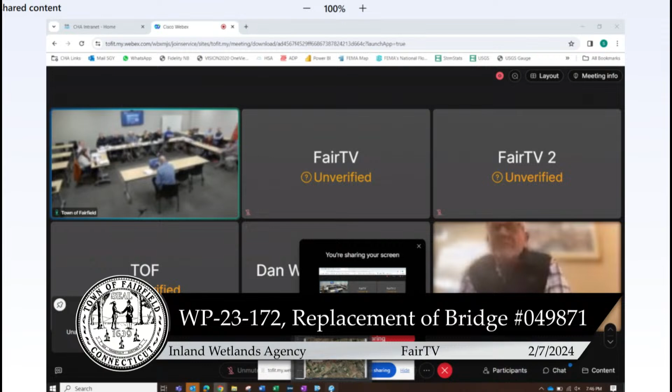That's the town, so. Actually, it's over here, okay. Alright, this is part of a state project. CHA, correct, is the consulting engineer working with the towns of Fairfield.

Welcome, thank you, good evening. My name is Scott Young, I'm a licensed professional engineer here in Connecticut. I work for CHA Consulting. As introduced, we are working with the state of Connecticut through the federal local bridge program, which is also partnering with both the town of Westport and Fairfield for this project. So we're here tonight to run through the proposed replacement of that bridge that's at the town line on Sasco Brook.

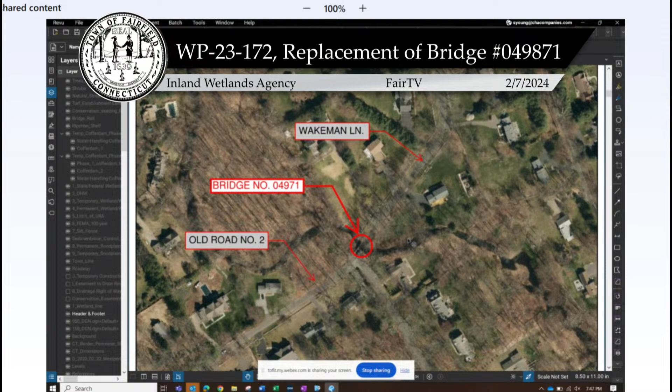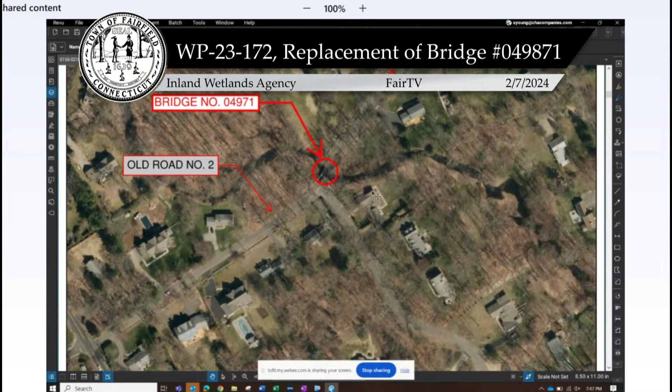And so assume this is good enough, everyone can see alright, there's one behind them. So just to get everyone oriented, Wakeman Lane here on the eastern side of the site transitions to Old Road number 2 into Westport, and here's the brook that's flowing essentially north to south. So just to get everyone somewhat oriented here.

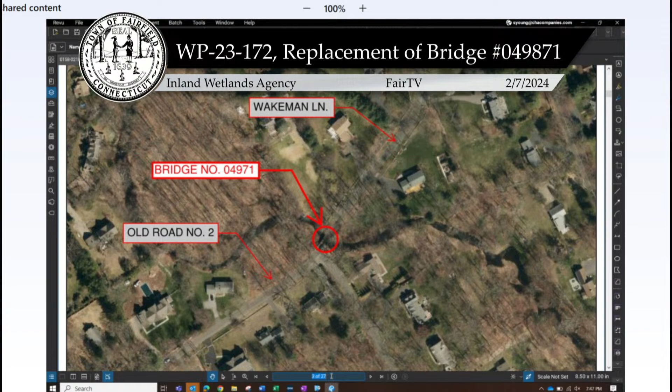So what I'll just do is go through the plans. These are the plans that you all have in front of you, or have seen at some point. What we've done is just put some colors on it to help the presentation, but I want to reassure you that we're not adding anything to the public hearing here. These are just the same plans that you guys have.

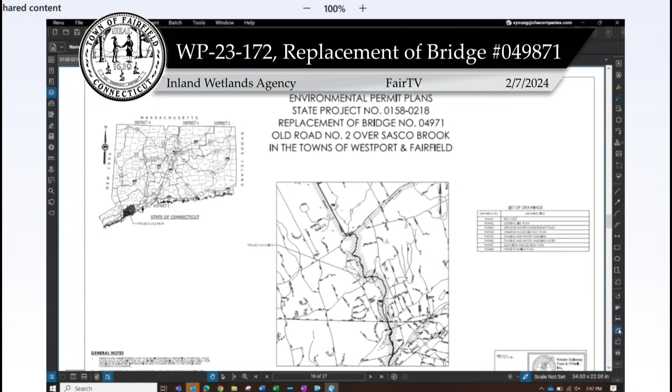This is too small, let me know and I can try to zoom in a little bit. That helps. Slowly, but there it goes.

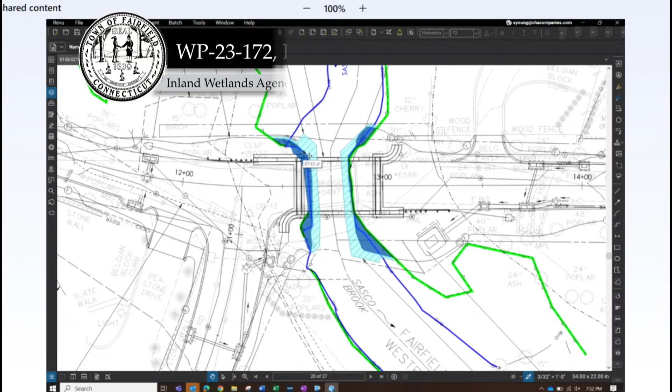So I'll just kind of run through the plans a little more here, just from a wetlands and water course impact standpoint - I'll try to zoom here a bit. The green lines are the wetlands, the blue lines are the water course. We have some permanent water course impacts in dark blue, and some temporary water course impacts in light blue, just from doing the construction and getting in here and doing water handling, keeping the river running while we're doing this work - that's what the temporary impacts are.

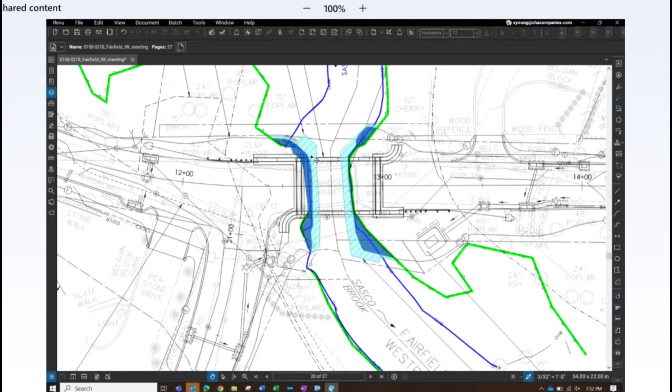I'll show you where that's happening a little later. But it's just removing the existing structure, getting those footings out of there, things like that. Those are considered permanent type of impacts, even though it'll be restored when we're all done.

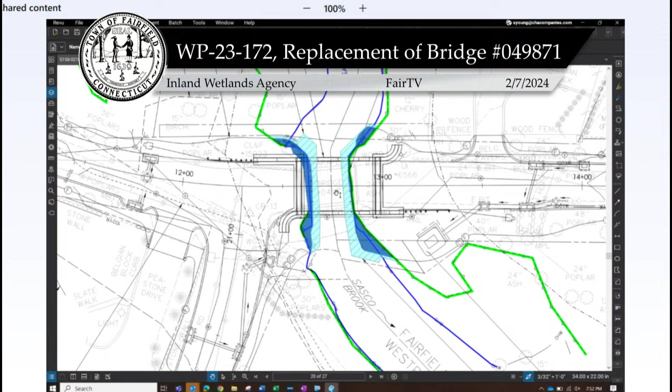So let's see the total impacts. In Fairfield, total impacts are about 110 square feet for wetlands, and for the water course about 380 square feet, so a total of just under 500 square feet of impacts in either wetlands or water course. The upland review area, which is another area you wanted calculated, is about 6,300 square feet, or a little over a tenth of an acre.

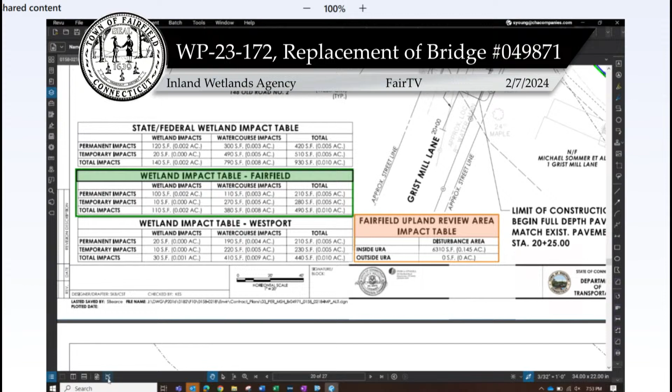As part of our process, we go through the flood management process with the State of Connecticut, which has a memorandum of understanding with DEEP for flood management certification on federal and local bridges. We look at all the town regulations in both towns, as well as state and FEMA regulations, to make sure we're conforming. This slide depicts the area that will be within the floodplain that will be impacted.

Whether it's cuts or fills or whatever, it's just an impact. The blue again is the temporary impact from water handling, cofferdams, or those types of things.

All told, from an impact standpoint, we're going to be about 10 yards less, because if you picture it, we're taking the bridge that was 3 feet and putting it out to 38, creating quite a bit of space there. We're actually raising the road some to make this all work, but the balance of cut and fill has been pretty much balanced. We've done a hydraulic analysis with HEC-RAS, which is software approved by the Army Corps, FEMA, and just about everyone, written by the Army Corps.

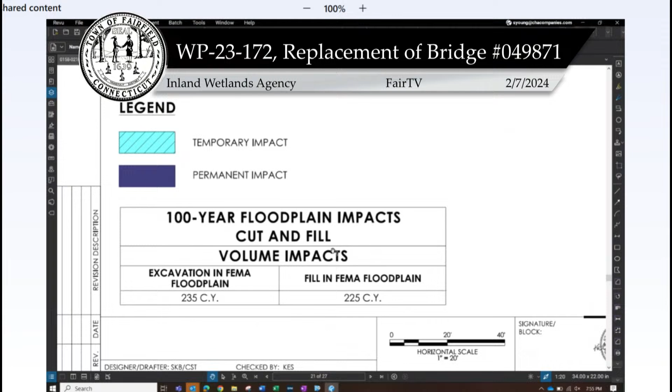We analyze the whole water surface up and downstream. We start at a known elevation from FEMA, go up to a known elevation from FEMA, and do that analysis to make sure we're all good. So even though there's a little change in the floodplain, we've modeled all that to ensure there are no issues as far as water surface elevation.

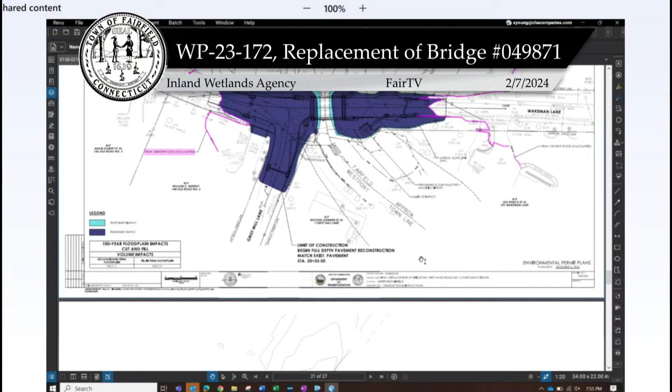Like I mentioned, we'll be closing the road down. This slide depicts to a certain extent that the road will be closed. There'll be some barriers, maybe something similar to Jersey barriers, on both sides. We'll come in with a crane at some point, and it'll probably sit on this side. They'll swing the work into place, so this just gives a quick depiction of what's going on out there as far as work.

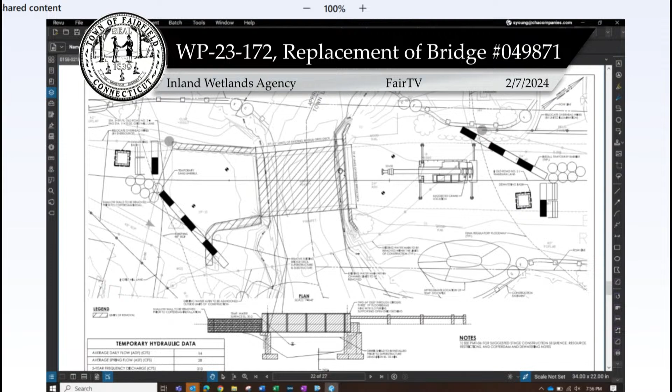We'll be pumping water when there's footing or foundation work going on; we have to discharge any water from the holes. It'll come up and be discharged into dewatering basins outside of wetlands, ensuring that water stays clear.

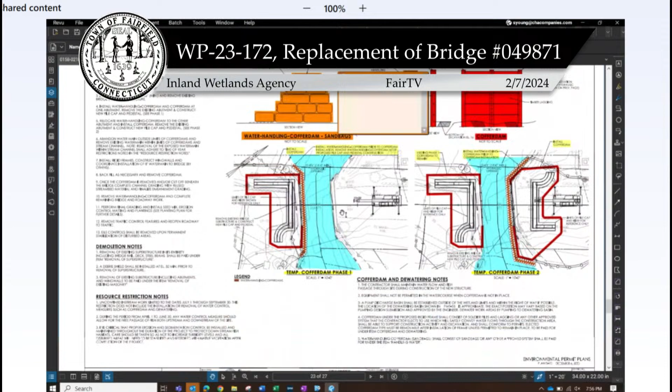So from a water handling standpoint, let's zoom in—this would be phase 1. This is essentially the Westport side, or the west side of the project, where we anticipate starting, based on the alignment of the brook and so on.

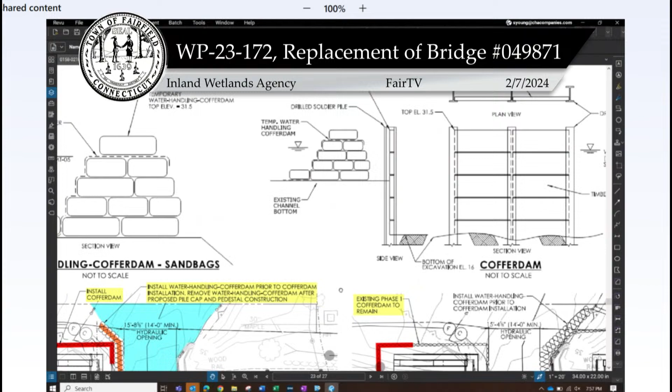We would end up putting in a cofferdam here—essentially sandbags type of thing for water handling. Then we'd actually put in a more rigid cofferdam, steel sheeting or something, so you can do work below grade from a safety and water standpoint. Between the two red lines here, we'll be using a slightly different system with a cofferdam—a soldier pile and timber lagging system, because once we put the structure on top, we can't do it the other way.

So by going with this type of structure—this is a top view looking down on it—they'll put piles in the ground probably every 6 to 8 feet, and then put timber in between to create that buffer or seal. When all is done, they'll remove all the timber and cut those piles down 2 feet below the stream level, because they can't pull them out, unlike the steel everywhere else which they can pull out. That's because we just put a cap over it—the precast structure will be sitting on top, so we can't get through the roof of that to get down to it.

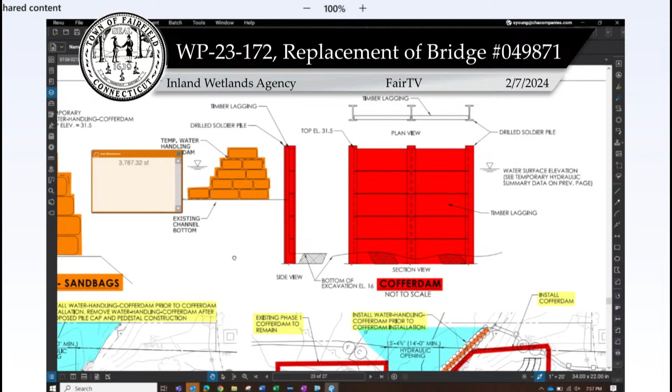So that's only happening where the bridge itself is. On the outside of the bridge, we'll get that out, where we just put this 3-sided cap on top, closing the lid over the river. We can't then pull these piles out because we can't get to them.

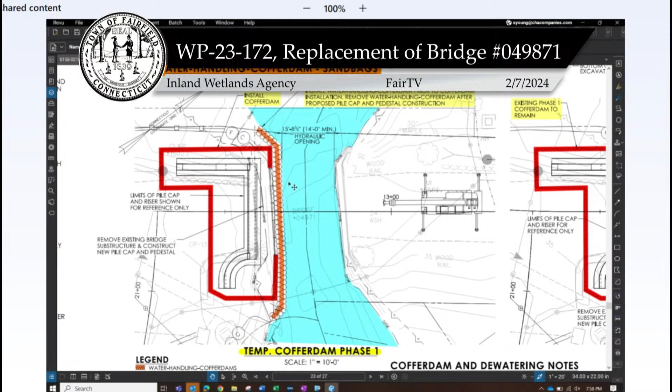Do you all anticipate using pressure treated timber? I doubt it, because it's not a timber you're looking to last long term like that. It'll probably be oak or something, because it'll probably be something you want structurally sound. And if that's something that concerns you, certainly put that as a condition. That's something we want to make sure of.

Excuse me Scott, if I may, Bill Hurley, Fairfield Engineering Manager. You said 2 foot below stream level — do you mean the bottom of the stream, or do you mean water level? Good question. It'll be the bottom of the stream.

So nothing will be sticking up, right? That's the intent, to get it down below so that as the stream moves a little bit here or there, you won't see these things. That's right, that's pretty much a standard — to go 2 feet below the stream bottom level, I should say.

So while all this work is happening on the Westport side, we'll maintain a 14-foot wide channel through here for the river to flow freely. Fisheries folks have seen this, they're all happy with that, as long as we're not cutting the river off, which we're not — we're gonna maintain that.

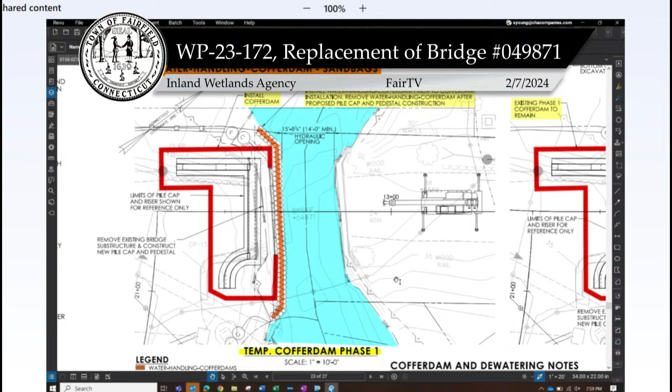And then phase 2, we'll basically move the sandbags over to the other side, put a similar type of system in, and construct that footing on that side. And then again construct the bridge. We'll remove the work and the sheeting that's in place.

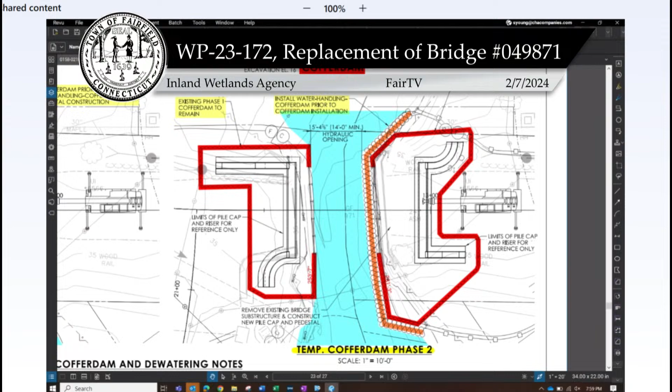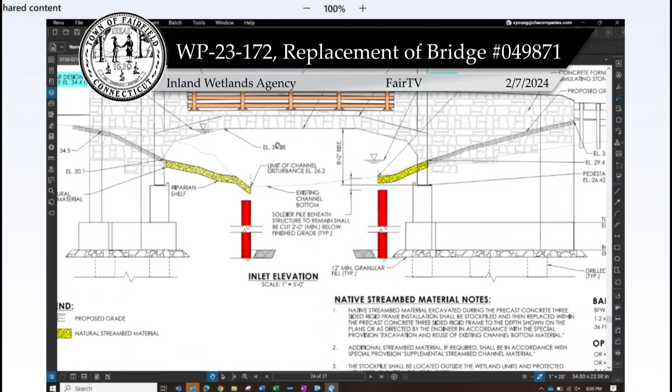This is an elevation view, or side view, of the structure. So this kind of answers your question of how deep it will be — it'll actually be 2 feet below the bottom of the stream level. This is the inlet, or upstream side, so we're looking south here. Water's flowing toward the bridge from this point of view.

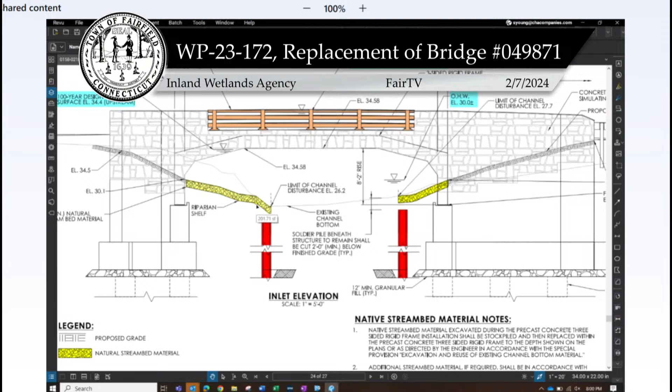There will be some natural stream bed material — not riprap, sorry — put in here for the riparian shelf. It'll be pretty much on the Fairfield side, the left-hand side as it's flowing downstream. So that will be constructed there. You'll see it also on this downstream side looking upstream, so that's also there as well.

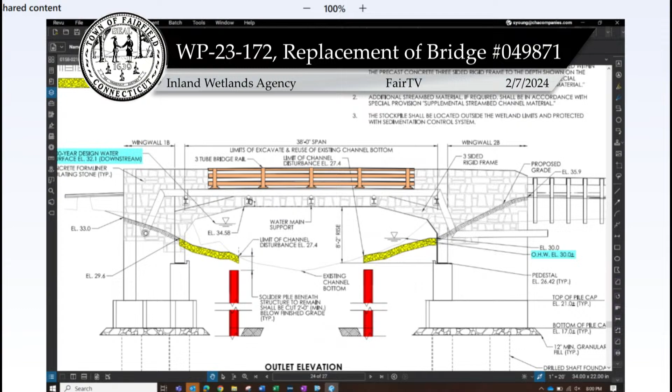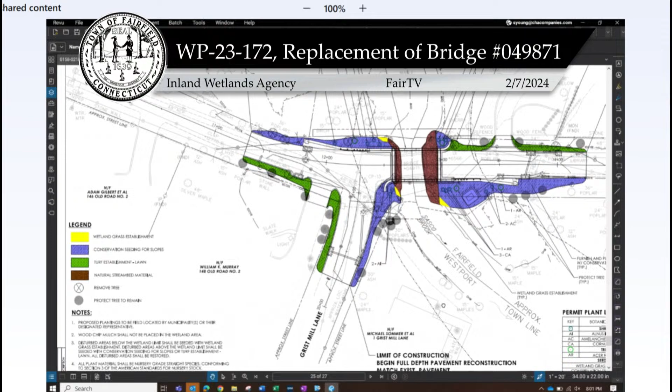From a planting plan, we'll come back in here, and anything being established below the wetland level, reestablished due to temporary impacts, will be planted with the wetland seed mix. Those will be replaced. Conservation mix on other slopes that aren't lawns, and then we also have a turf establishment, which is the green. The conservation mix would be the purple — that'd be your natural slopes not being mowed regularly. There'll be some plantings and things like that. There's a planting list on the plan, so I'm sure you've all seen that.

I think that hopefully paints a picture of what we're doing out there. We do have the designer from Fuss & O'Neill also on the call, so if we have specific questions about the structure of the bridge — CHA have done the hydraulics and the permitting, along with Fuss & O'Neill doing the structural design.

Thank you very much, if there's any questions or comments. Scott, what is the bridge itself going to be made out of? Right now it's a steel grid, with a walking area on the north side. What will the bridge look like? The new bridge will be a concrete structure, a precast concrete.

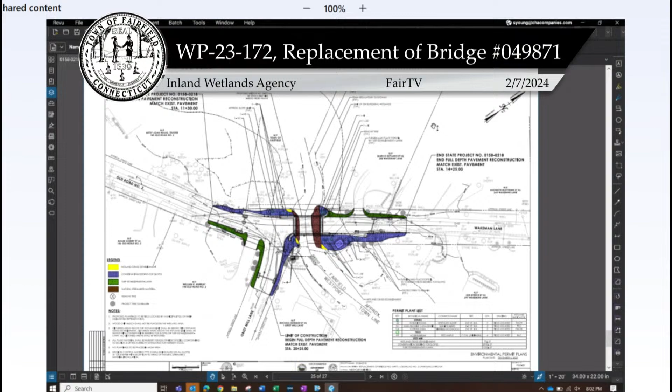If you don't mind, I'm going to comment — my understanding is they're really going to be 10-foot travel lanes and a 2-foot shoulder. Yeah, just the pavement width will be 24, that's right. We'll give it pavement markings that only show it like to be 20-foot wide.

It's not conservation related, but we wanted to make sure we weren't criticizing widening it too much, making it a speedway. Both the towns and the state agreed to that. There's certain program limitations because it's federal funding, they want these to meet certain standards. So we work with the town to make sure the width of the road and those types of things work. Thanks for that clarification.

I have a question or two, but I want the commission to go first. My other question was, what is the lifespan of this bridge? I'll be long gone by that time. It's typically 75 years. That's what I just wanted to know. I was thinking, it was the sixties, how much time are we going to get out of this bridge? Yeah, typically 75 is what we're looking at. Precast structures probably last a lot longer than that. It won't be our problem, exactly.

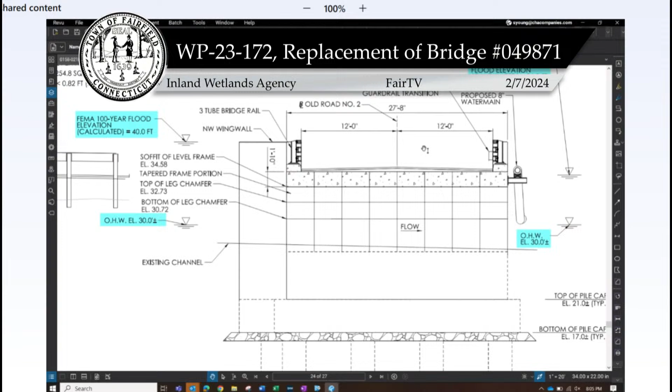Commissioners, any other questions or comments? Ted, good? Okay, thanks. Maybe just 2 minutes, because when we had the public informational meeting, which is what we usually do before they go to conservation, it was during COVID, that's how long it was designed, unfortunately. This is a public hearing, so I wanted all. A couple questions - I know there are some people here from the public concerned about driveway access next to the bridge in particular, and then trees were another concern. I think there's definitely removal of one on the Fairfield side. Do you know if there's more than that? And would they be replanting anything when the project is completed?

I'm not sharing right now, but let me share again. No, that's okay. So on the planting plan, which is the last set of the permit plans, there are a bunch of trees marked with a gray circle. Those are all called out as protect tree to remain, so a majority of those are remaining. There is one, it looks like near the end of the project, that has an X through it, which would be one coming out on the Fairfield side. It's a little bit further east of the driveway, probably 20 to 30 feet east of the driveway. There's one that's coming out, and there's a couple on the side as well. And that's just from a...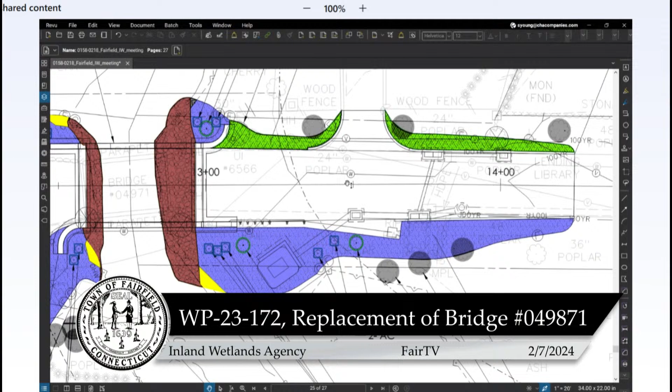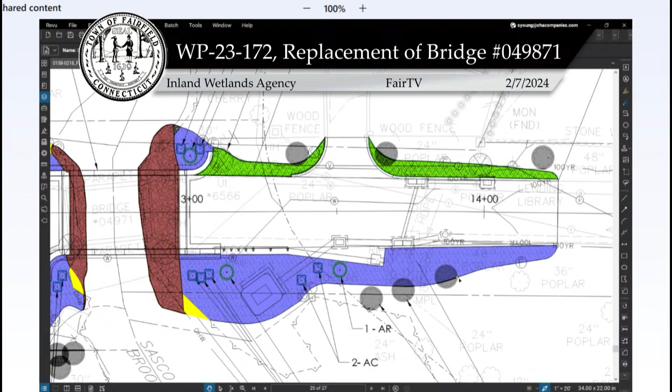Coming up, there we go. Perfect, okay. So the bridge is here, and here's the driveway here. And so here's the area of the tree that's coming out, this one with the X on it. So it's about the property line. Yep, you're right, at the property line. These other ones that are shaded in gray are all called out to be protected. Yeah, because there is an issue right now that there's a bunch of...

All right, before we do that, if you're going to speak, that's fine, tell us your name and address. Hi, I'm Roberta Deplano, and that's my property, on the corner, which is 288 Wakeman Lane. That is your driveway? That's right, my... Okay, thank you. And there's already some issues with some of the trees - they're completely dead and have to be removed by the town because otherwise they're going to fall on the power lines, which is something I don't know if my husband has already brought to the attention. I don't know if that's one of them. I have to look, but there were some pictures because there's one on the riverbed and then there's two right towards that area.

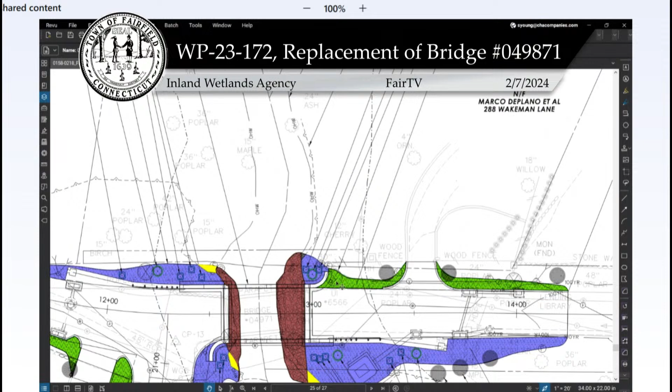So you're saying you're gonna keep the big ones that are currently there? Those shaded in gray are to remain. I didn't see it, but underneath the green here, there's one right next to the bridge. It looks like it has an X on it as well. I apologize for not seeing that.

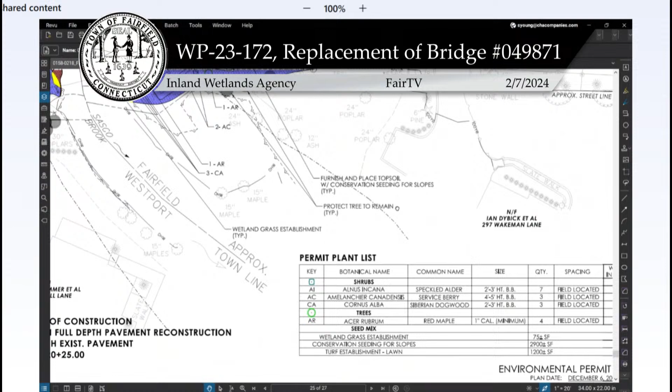So if you remove some trees, obviously that affects the water retention or the property slope. Trees serve a purpose, but how would that affect it? And would you replant something there?

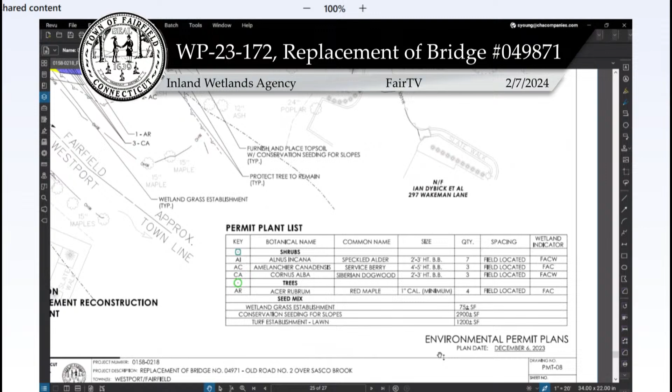Well, the planting is already listed there, so he's already provided that information. The town will only remove trees in the right of way. If they're on your own property, that's your responsibility. So those trees in the right of way, the town will remove them. If they're on your property, then you're responsible.

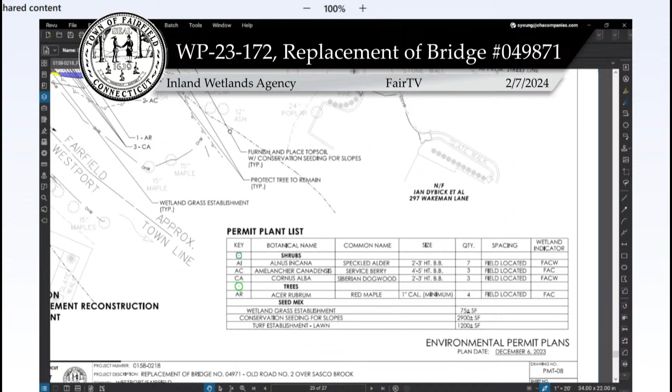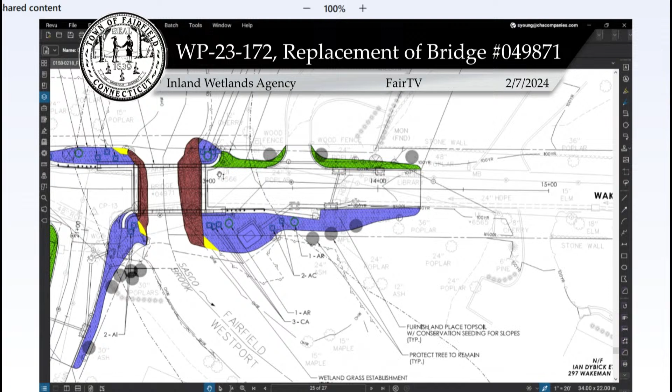So what we're doing here is giving information about this project as it relates to the wetlands. If you have issues that relate simply to your trees, you'd have to look at where the trees are in relation to the right of way. If they're within the right of way, they do what they need to do. If they're outside of it, that would be your responsibility.

Okay. Anything else, sir? Do you have another concern? Yeah, I do. I have a bunch of questions, actually. Okay.

He was talking about also raising the road slightly, to accommodate the bridge. Okay, because we've had some issues with that. We had flooding, we have the 100-year markings, and when the house was built up the road and they did what they did with the different pitching and everything, we got inundated with water.

Because now I've been having issues with that all along, and if you're gonna raise it even more, that's gonna create another problem. And then there's all the water that just comes into my property and bunches up. How are we gonna deal with that?

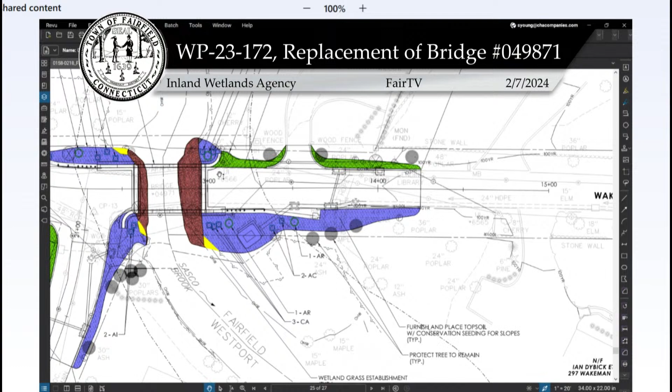Couple of different ways. What I want to paint the picture of is, right now the bridge is only 23 feet wide. We're going out to 38 feet wide, almost doubling the size of it. Right now with the flood elevation, it actually hits the bridge and has to overtop the road. The water hits the bridge, right? You've seen it, I haven't, but it gets very high. It hits the bridge.

So we're widening this out so that the water won't hit the bridge, it will actually just make it under, so it won't be overtopping the road. And from the models that we've run, the upstream water surface elevation is right spot here.

This is the one, I'm sorry. It's gonna be almost 2 feet less, 1.8 feet less upstream -- meaning going up towards your property, where it hits the bridge -- because we've opened that up, the water will be flowing through the bridge better.

You're opening even the bottom part of the river, right now it's very tight. Yes, you're gonna open it up. So that means the water will be lower, more shallow than what it is now, right?

Yep. How's that gonna affect the area? Water won't hit the bridge, water will go through the bridge. So it shouldn't come up and go over and possibly go into your property.